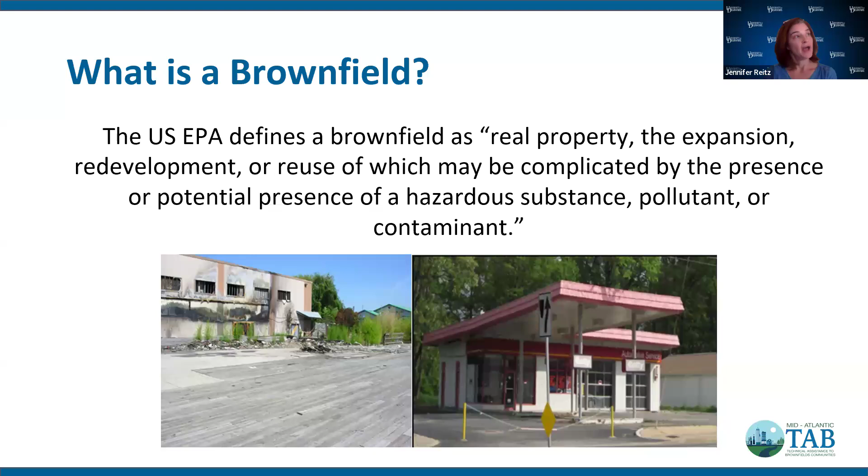But again, just back to basics, and for those who weren't able to join us last week, a brownfield is a property whose reuse essentially is hindered by the fact that there is either perceived contamination or real contamination on that site. And so a lot of these sites were developed as part of our industrial era in the US. And so they're located near waterways or transportation, because that was the most advantageous place to be. And many are located in or very near communities that became disadvantaged or had concentrations of poverty. And of course, that legacy of industrial pollutants poses health risks and contamination both in the environment as well as for the communities living nearby.

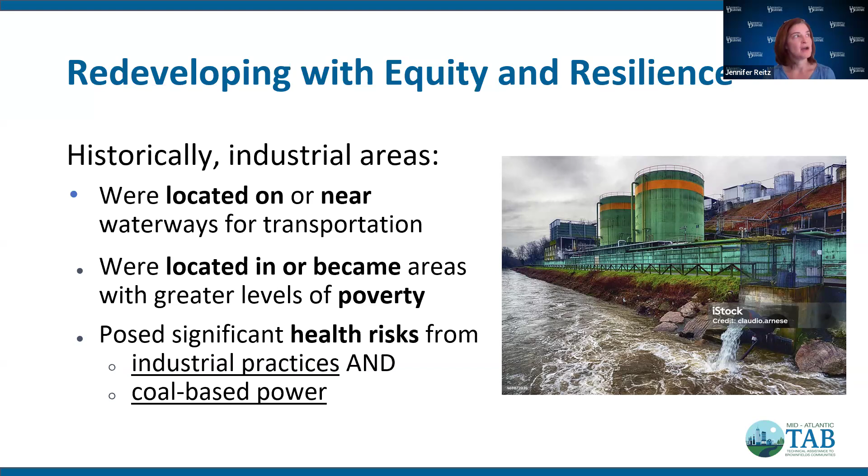And so brownfields redevelopment becomes a unique opportunity to actually reduce those past harms by remediating the contamination, but also building resilience for the future and looking ahead. And we can do this by incorporating greener practices into the redevelopment, as well as cleaner energy, and really building those communities and making them stronger through the redevelopment process.

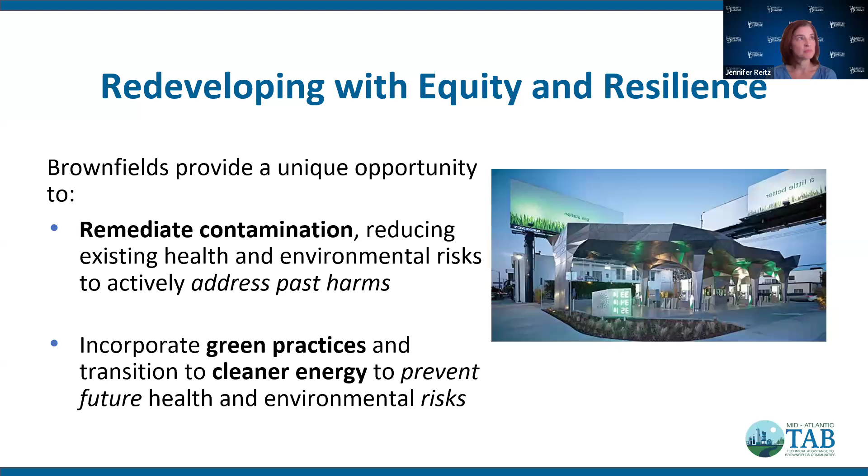I think you're all on the call. We all know what's the right thing to do, and it makes your grant application more competitive.

So I'm going to jump into demolition, and then Lori's going to pick up with cleanup, and finally Mark and Catherine will do the redevelopment piece. So

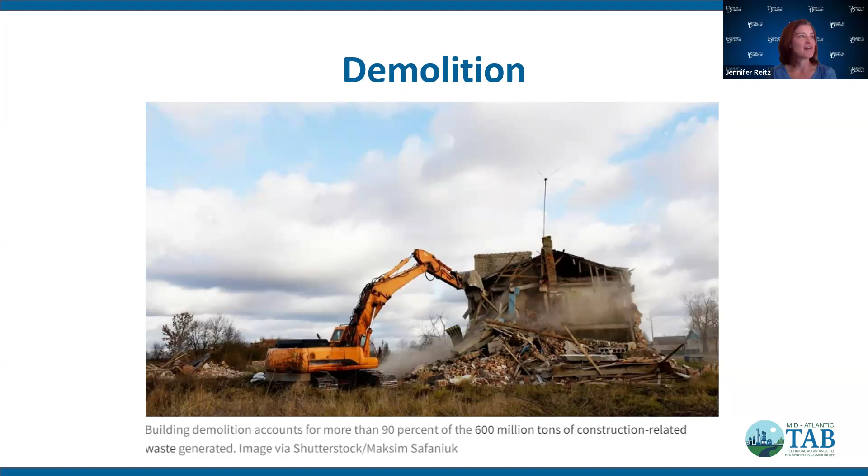Demolition. So building demolition, this was an astounding number to me. Building demolition accounts for more than 90% of the 600 million tons of construction-related waste that ends up in our landfills. And this is every year. This isn't over time. This is every year. Almost 150 million of construction debris was sent to landfills in 2018, which means there is a significant amount that's being recycled, but there's still opportunities for more of that to be reused.

Brownfield remediation, of course, requires the removal of large quantities of building materials, structural materials, and site materials. It is mechanically removed typically and will end up in the landfill, because some of it is contaminated, but maybe not all. But right now, a lot of times the whole site ends up in a landfill, or all of the debris goes there, regardless of the levels of contamination and/or viability. So what's the alternative?

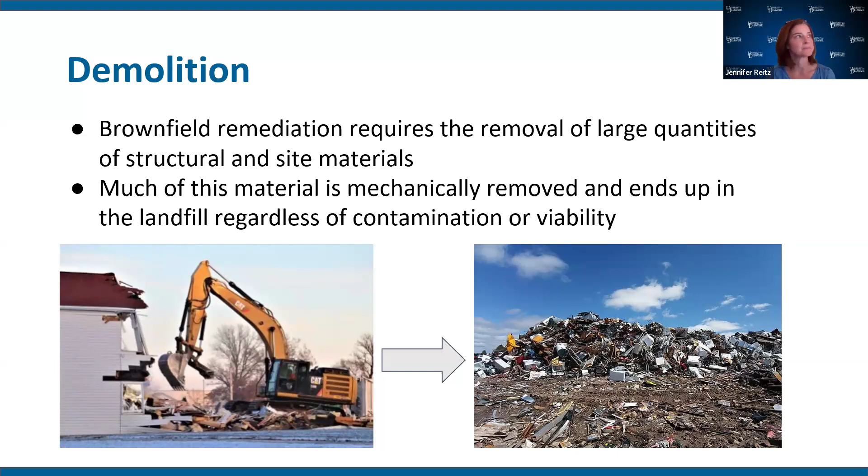Deconstruction basically is the systematic disassembling of parts or whole of a structure in order to recover maximum economic and public good through reuse and recycling. And this is a definition that comes from the city of Pittsburgh. There are several of them, but basically the main parts are really that systematic disassembling of the materials so that you can look at them individually and decide what can be reused and can expand its life cycle instead of landing up in the landfill.

And the other part that I think is really helpful in this is that it doesn't have to be the entire building, right? We can just look at a parcel or look at what's on site and say, okay, maybe it's just the hardwood floors, maybe it's just the windows or the doors or specific structural items that can be reclaimed and reused. And we'll talk a little bit more about that in the next slide.

But in general, the benefits of deconstruction are we're reducing the waste that goes into the landfills, but we're also reducing the need and the demand for virgin materials. And so there's less woods and forests that need to be cut down to create new hardwood materials when we have hardwood that we can reuse. Deconstruction is a labor-intensive process, and so it provides the opportunity to create jobs and become part of what's known as the circular economy, where we're really trying to use materials for as long as possible, but train people to actually participate in that part of the economy.

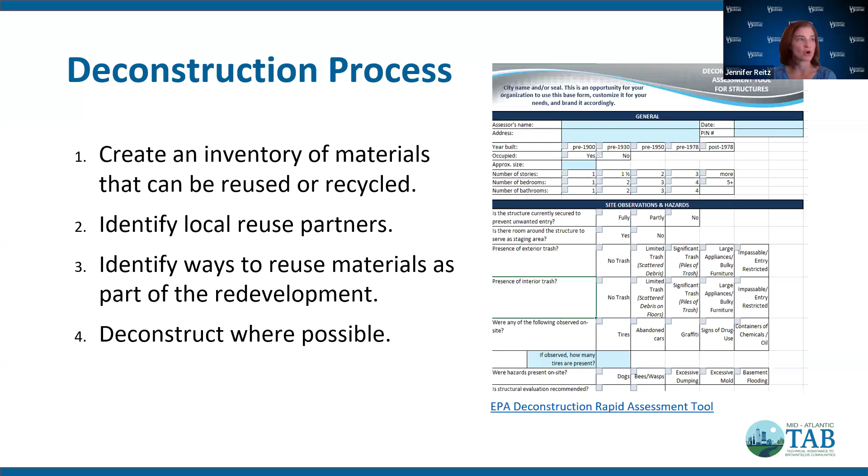But it's a good tickler, to look at and see the variety of materials that actually do have repurposing ability. For me, I would never have thought of roof shingles as something that could be recycled, but it does have a list of that, as well as what the conditions of those materials are, and can just be a starting point when you're looking at this.

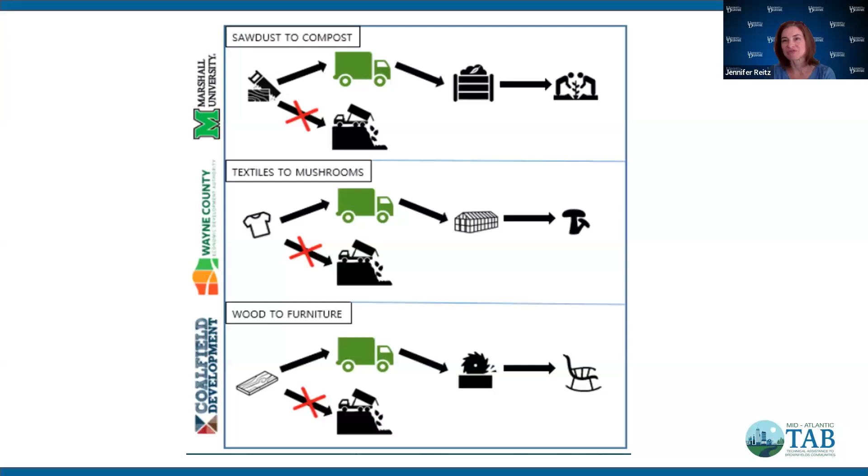Again, when you're talking about materials, some of the things you might not think about, and this was produced by Marshall University for one of the developments that we'll look at a little later. The idea that sawdust is compostable, or textiles and other fabrics can actually be reused to grow mushrooms, which in Pennsylvania is a big industry that we have. And of course, wood to furniture and different types of things there.

But then the direct providers, there's Doors Unhinged, which is actually a national company that just does doors. They specialize in deconstructing commercial doors and commercial rated doors and rehabilitating them and then selling them. And the Community Forklift and Second Chance are, I believe, in the Baltimore area. So they are out there.

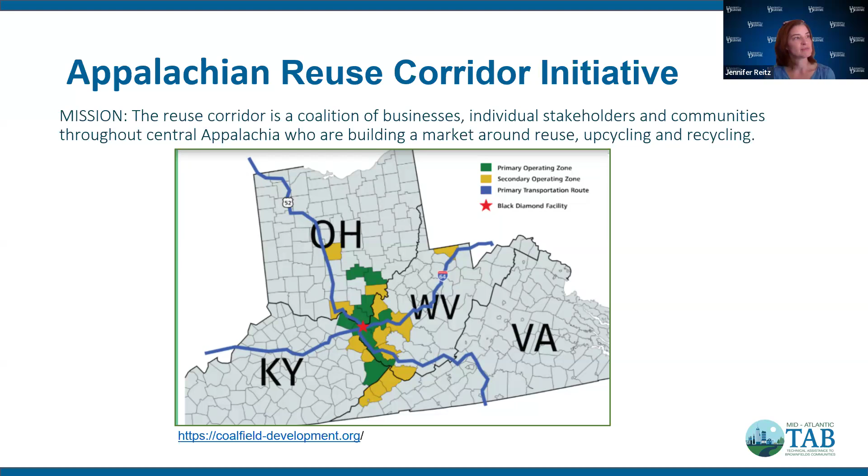And the red star at the center, which is the Black Diamond facility in Westmoreland, West Virginia, is a brownfield that doesn't look much different than what it looks like in the picture right now, but the vision is for it to be remediated and redeveloped as a reuse warehouse. So kind of that central location for these materials to go, as somebody deconstructs, they can perhaps donate or direct it to this warehouse, and then other people can come in and look at what's there and be able to reuse it in other projects.

The other thing I do want to mention is probably where most of the deconstruction work is being done currently. There's a lot of municipal pilot deconstruction projects. And so City of Baltimore actually ran a pilot. The pilot has ended at this point, but there's a really great video on YouTube. I'm not going to share it right now, but the link will be there in the slides when you get a copy of the slides, talking about all aspects of that circular economy and how deconstruction fits into it.

Pittsburgh is currently running a deconstruction pilot program, and it is focused on city-owned land. So they're land-banked vacant properties, and they're partnering with local nonprofits and contractors to do deconstruction and reuse those materials and keep them out of the landfills.

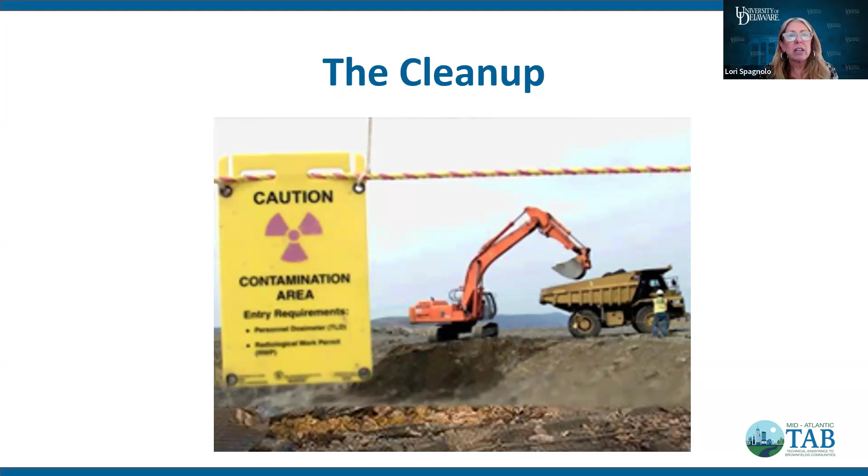And there are a couple overarching principles to keep in mind. First, you want to minimize the environmental impact and reduce the footprint of the remediation techniques that you're using. And you also want to optimize resource use, whether that's water, energy, or other raw materials that you may be using. There is a standard for this, the American Society for Testing and Materials, and it really outlines all the specifics involved, and you will have the link if you want to take a look at that when you get the slides.

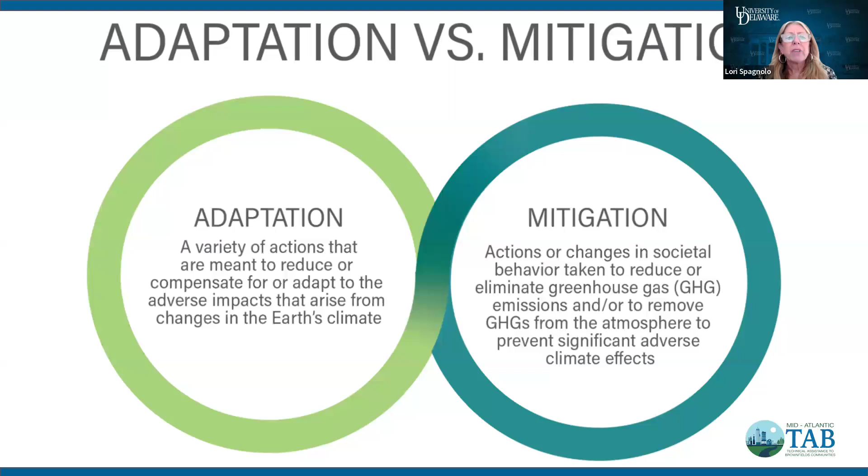So first of all, adaptation versus mitigation. There's kind of two components to resiliency. The first is adaptation, and we can look at that slide. That is really using materials and resources that can withstand climate change. So whether that's organisms or plants that have a higher tolerance to a range of climates, or stabilizing the conditions yourself, whether it's temperature or something else, to really enhance the aspects of the cleanup. The next piece of it is mitigation.

And that's where we really want to focus on reducing greenhouse gases and emissions that are exacerbating climate change, right? So here's where you look at energy efficiency, low emission vehicles and equipment, and use of renewable energy, okay? And so some techniques use kind of one approach, some use both.

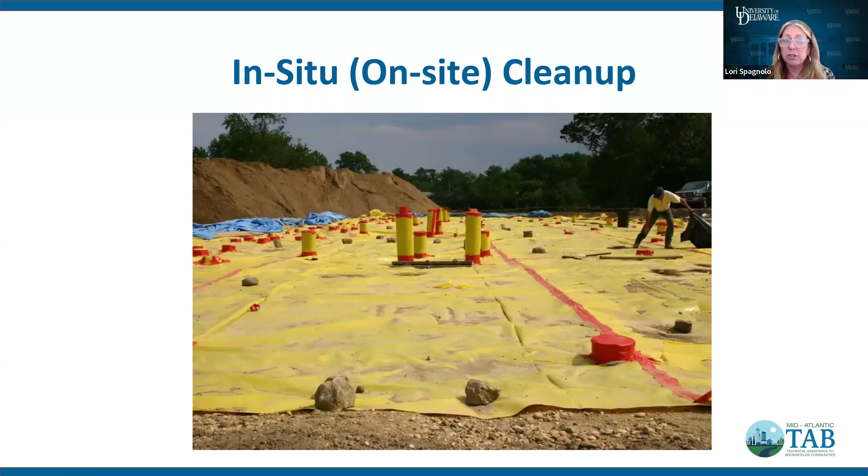First, we'll look at some of the in situ or on-site techniques to clean up a site. And the first is bioremediation, right? And that is really the process of using microorganisms that are going to neutralize these contaminants and remove them from a polluted environment. So in this particular case, we're looking at adaptation, right? We want to use climate resilient microbial strains that may be able to break down contaminants and again withstand a larger range of climate circumstances. And then, like we were just talking about, you can manage that temperature to really optimize that microbial activity.

Another process that is an on-site technique is called phytoremediation. And this is in particular one of my kind of favorite new technologies. It's not very new, but it just seems to have so much promise. And it's just fascinating to me. And this is the use of plants that uptake and accumulate different contaminants, which can then be sequestered or destroyed.

For example, I've heard that things like ferns and mustard greens are really effective at uptaking heavy metals in the soil, right? So in terms of resiliency, you can use a species that, again, can withstand a wider range of climate conditions and also look to capture and store that excess carbon dioxide. So this is an example of an approach that combines adaptation as well as mitigation.

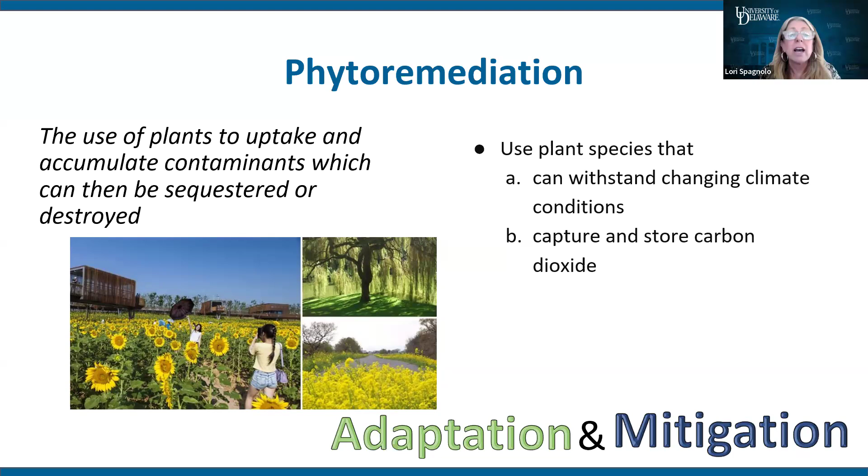The next technique we're going to look at, and this is perhaps more traditional, especially when it comes to petroleum contamination, is soil vapor extraction, or sometimes called air sparging. And this is when you're pulling the VOCs or volatile organic compounds out of the soil using a system of wells and pumps, and then the vapors are treated and purified before they're released back into the atmosphere.

So this is an example of mitigation. We're looking at using energy efficiency here, right, with all the vacuum pumps and optimizing the extraction process to really minimize the use of energy.

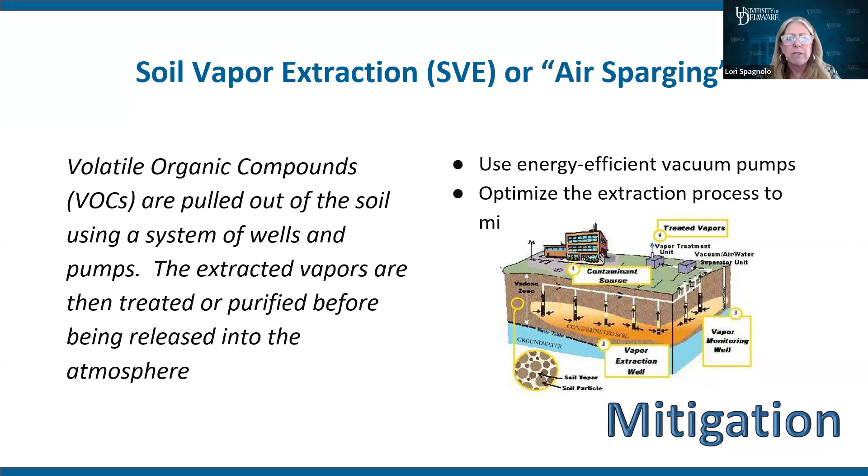And I'm sorry that cut off right there. We can fix that before we send the slides out.

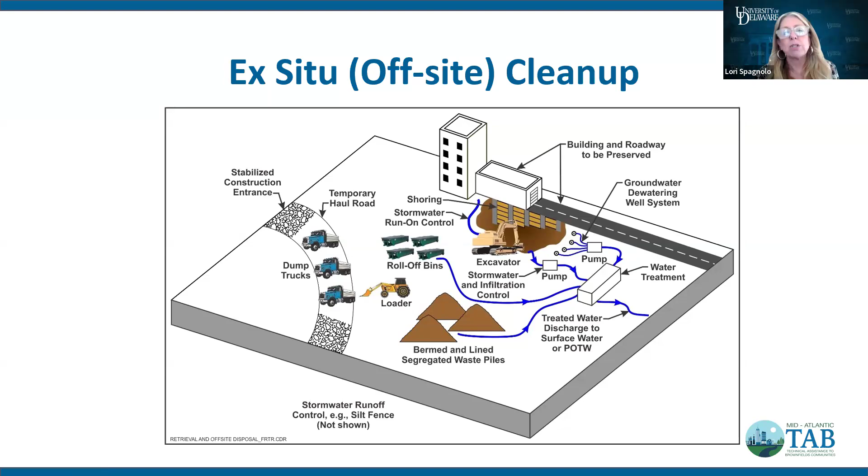So on to, I think we're going ex situ now, offsite cleanup. And the first, again, kind of more traditional technique that you may see used a lot is excavation and treatment, or they call it dig and haul, right? This is essentially where you just dig up the contamination and you physically remove it from the site, and then it's treated somewhere to neutralize it.

It could be incinerated or something else. So here is where you want to kind of mitigate your impacts using dust control measures and low emission transport, and even considering using landfills that can capture and utilize methane emissions.

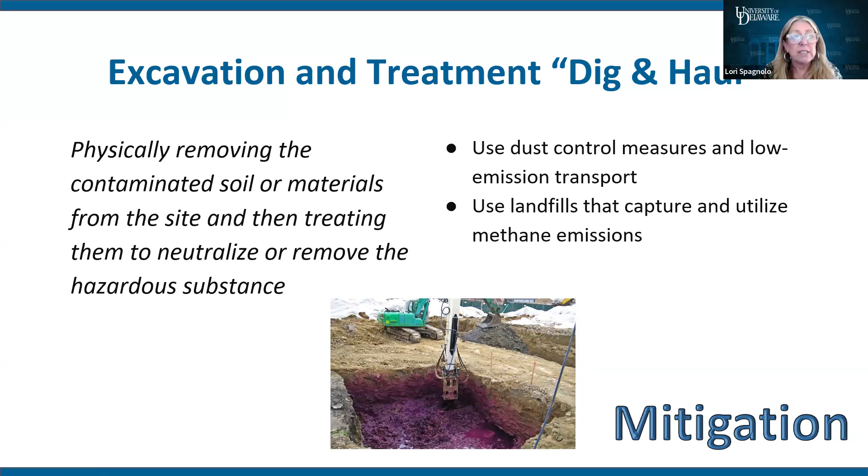Next slide. We do have a couple other types of techniques. Thermal desorption. This is where the soils or sediments are heated until they vaporize, and then they're treated or they're collected to be treated somewhere else off-site. In terms of mitigating aspects of this type of cleanup, you can look at powering your desorption units with renewable energy, whether that's solar or wind, and potentially capture and reuse the heat that is generated during this process.

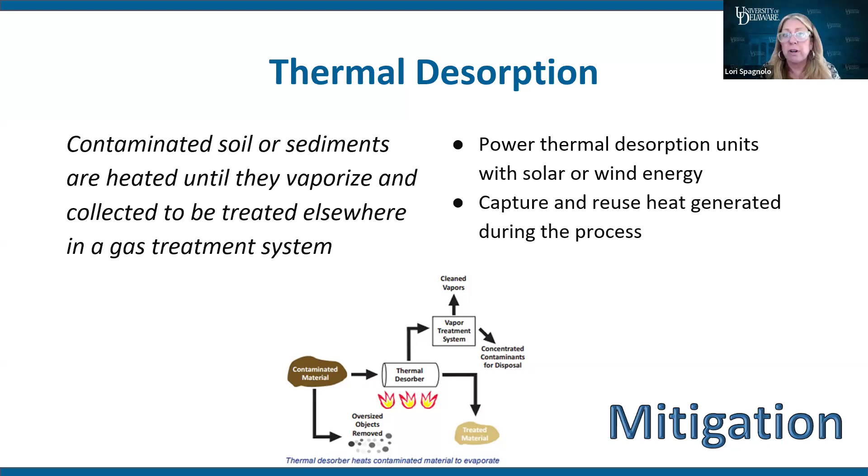Finally, we have chemical treatment, and this is really the use of chemicals to kind of neutralize, convert, remove the contaminants through reactions like oxidation, precipitation. And in terms of adaptation and mitigation, you can select chemicals that are less volatile and more stable under changing climate conditions. And you can use environmentally friendly chemical processes and reagents as well. This can really be in situ or ex situ.

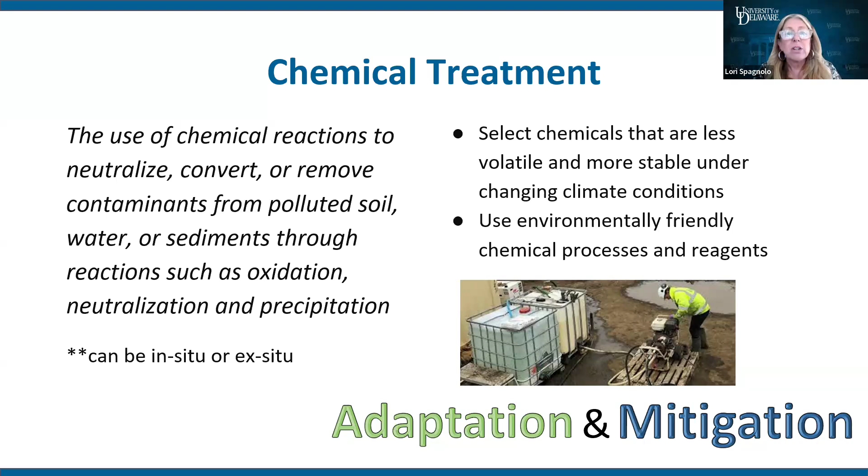So finally, you may be thinking, well, how do we possibly choose between all these remedial techniques? Well, the EPA does have a set of spreadsheets. It's called SEFA, or Spreadsheets for Environmental Footprint Analyses. And it's a set of Excel workbooks, which actually calculates the carbon footprint associated with a cleanup, looking at 21 different metrics that evaluate aspects of materials and waste that are being used and generated, the use of water, energy, air, and land and ecosystems.

It is a very complex system, but it's absolutely helpful and a great way to really be thinking about the impact of the type of cleanup you select. And a lot of you on the call may not be doing this yourself. You may be just subbing this out to a consulting company, but you need to know to ask for it, right? We need to be able to ask the questions of, what type of impacts to the environment and the climate is the type of cleanup going to have that you're recommending.

So I think it's important that we just put this out there and have that understanding that there are different ways to approach this, and there are different ways to look at the impact that a cleanup can have on the environment and the climate resilience in the future. And so with that, I believe that we are moving to redevelopment at this point.

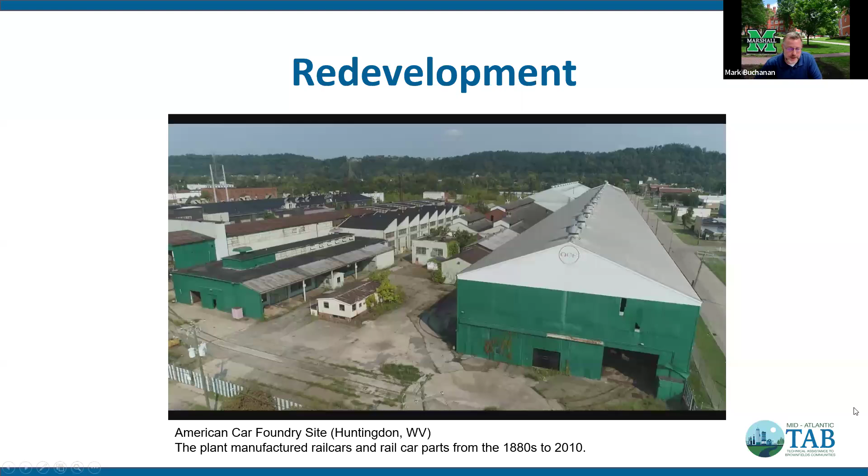And really the anchor is another brownfield site over here in this left-hand corner. Marshall University just put a brand new baseball stadium in over here. It's pulling a lot of folks in during the spring to see baseball games. In addition to that, there's a minor league team that plays there through the summer. So really good things coming through. Next slide, please.

When sites get redeveloped, it is an opportunity to redevelop the project in a manner that positively contributes to creating a more climate change resilient community. In our part of the country, we're looking at severe rainstorms increasing in severity and frequency, higher temperatures, those kinds of things.

In this next set of slides, we've divided some stuff up. First, green infrastructure: we want to talk about how we manage all that extra water in a greener fashion to try to combat climate change. We're also going to chat about green building techniques. When we say green building techniques, we're talking about an umbrella, and under that umbrella is a variety of different methods. We're just going to chat about a few of them.

And of course, we can't have this conversation without bringing up renewable energy, and energy efficiency is a fair topic as well. Next slide, please.

Before we get going too far, I like to give context about how and why. I'm a former stormwater manager, and this stuff is always near and dear to my heart. So I apologize for those not familiar with it, but this really does play a role. These problems we're going to be having with excess water, urban flash flooding, can all be attributed back to the urbanizing landscape. That means an increase in impervious surfaces like roads, roofs, parking lots. All of those things shed water.

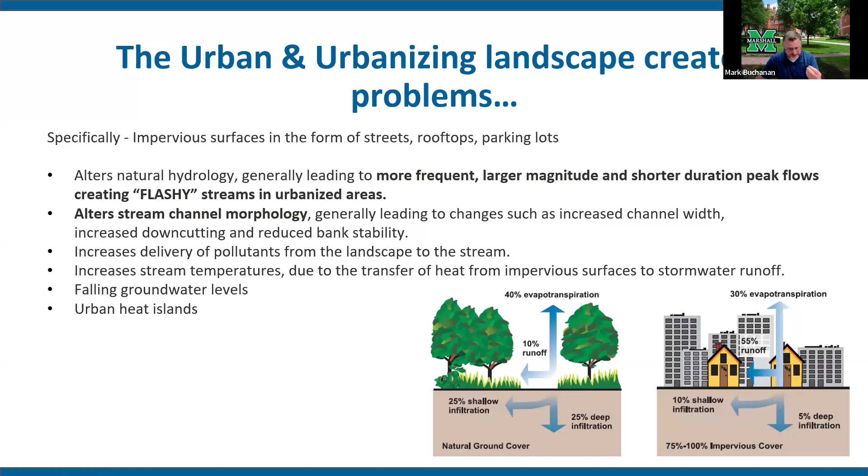Other issues that we would attribute to an urbanizing landscape is urban heat islands. Next slide, please. An urban heat island occurs when cities replace natural land cover with dense concentrations of pavement, buildings, and other surfaces that absorb and retain heat. Then you end up with increased costs for energy, for air conditioning, higher levels of air pollution, and some heat-related illnesses.

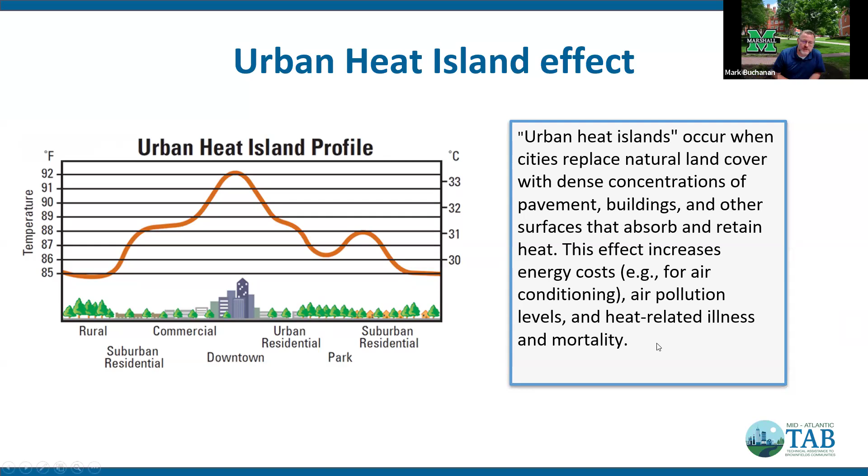The graphic on the left-hand side is a very simple concept. In the more rural communities, you're looking at temperatures running 7 to 8 degrees cooler in those more rural or suburban type settings as opposed to the more urbanized sections of town. Next slide, please.

So when we're talking about runoff and stormwater and dealing with that, we're always going to have a conversation. And for years, when we talk about infrastructure, you're going to hear some folks talk about gray infrastructure. Gray infrastructure is traditional stormwater infrastructure, basically gutters, drains, pipes, and in some cases, even some retention ponds.

When we speak about green infrastructure, it's sort of a broad topic. We're talking about a management approach where we're trying to mimic the hydrologic cycle. Instead of running the water off in a pipe and then sending it off to discharge in a local receiving body of water, we're trying to get that water down into the ground. Something more close to what it should be, trying to copy nature.

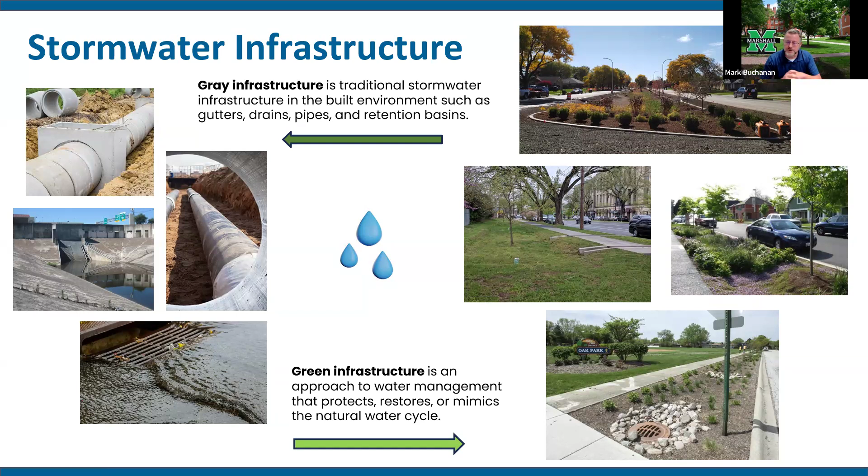Now, on a brownfield site that you're redeveloping, that could be a problem. And I have a couple slides later on showing that we ran into some issues when we were trying to do this on site here on campus. Next slide, please.

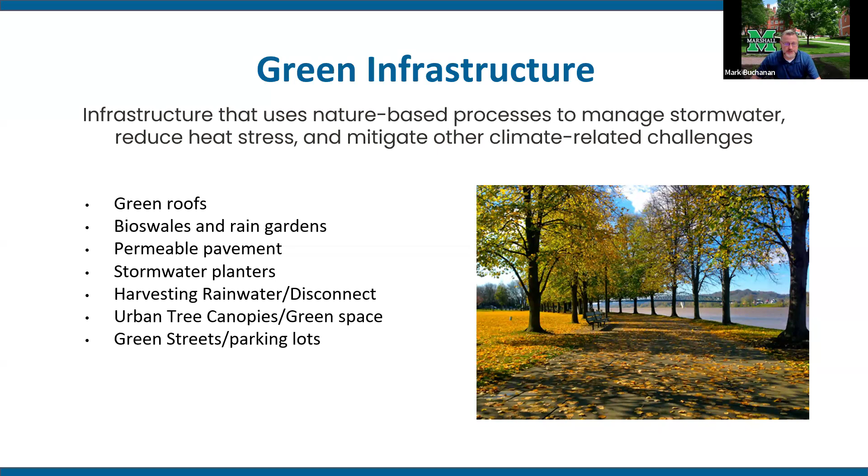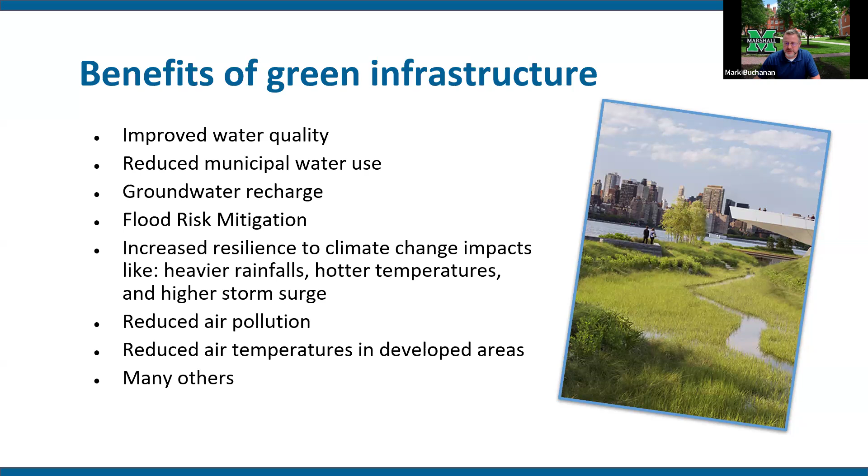And I'm the guy, when we're on vacation, we stop and take pictures of stuff like this, and my wife just rolls her eyes. She can never see the attraction that I have for this kind of stuff.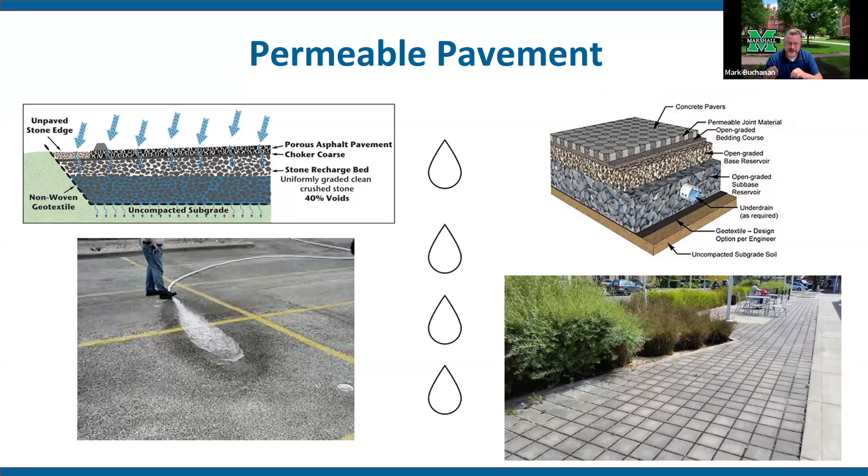Both of these are going to require, I don't want to say extensive, but there's definitely maintenance that will have to be considered if these become options in a project. Because if you basically just put them in and leave them like they're going to be the answer to your prayer, you're looking to have problems, because eventually the fine silts and stuff will fill up those pore spaces. And then there's definitely a level of maintenance that has to be considered with these. Next slide, please.

Stormwater planters. Occasionally, when you have a project and you're wanting to capture and divert stormwater, you might not have the real estate to be able to make a footprint for a rain garden or even a bioswale, or move it to another place. So this can capture it. It's almost like having a small miniature rain garden in a box.

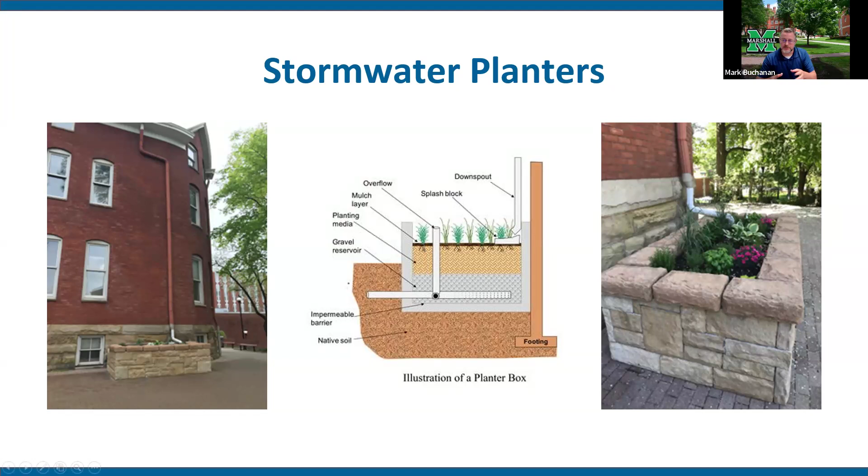Or put it right back down into the ground and mimic the natural hydrology of an area. Sometimes the best answer is trying to harvest that rainwater. And when you talk about a rainwater harvesting system, you can go from something as basic as a 55-gallon drum up against a building with a downspout going to it and an overflow, to some of this other stuff that's more elaborate, like in this picture on the left here, where you have an underground tank type cistern to capture water. And the picture down below that with the large green tanks, that's a fairly significant system as well. That's probably close to almost 10,000 gallons of water, I'm guessing, being stored there.

And none of this, at least in my experience, I've never been associated with a project where we harvest rainwater as a potable source of water. The uses you're looking at for this type of diversion would be landscape irrigation, even flushing toilets if you get it plumbed properly and put pressure on it, washing equipment, washing vehicles, and in some cases even watering livestock. That's an option as well.

One other thing I thought I'd at least bring up, this odd looking structure around the tank, that's sort of like a first flush that captures a lot of that excess stuff off of the roof that you might not want in your tank. So it really helps eliminate the maintenance on that as well. So again, you will have maintenance. Even with a diverter like that, the tank's still going to have to be cleaned occasionally. All right, next slide, please.

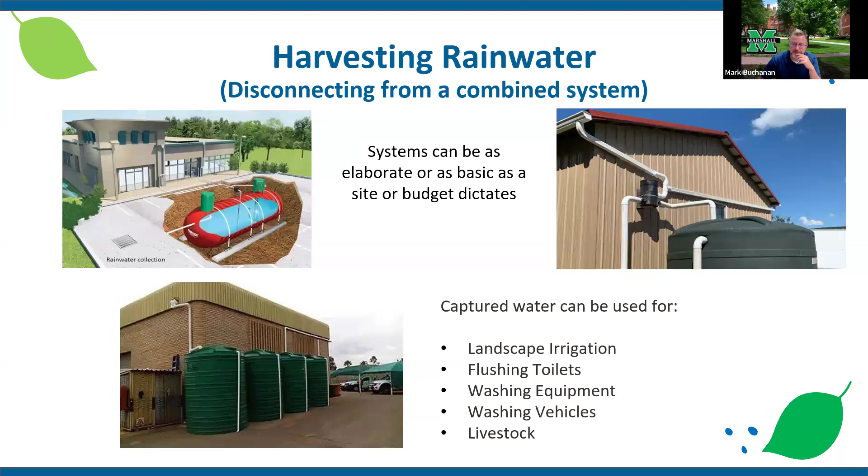All right, and like I mentioned earlier, we were looking at a project back in 2016 or 17. I'm getting old, and the years are starting to run together, so I apologize. I know it was somewhere around 16 or 17, but the university had decided that they were going to build a baseball stadium right here where this white star is at.

This is a brownfield site, which really wasn't that big of a deal. I guess they were going to consolidate material and place the stadium over that consolidated material, where they were going to get rid of the highest hazardous containing material off-site. They were going to send it to a landfill, but the rest of the low-haz stuff was going to be basically consolidated under the baseball stadium where that white star is sitting at.

I came into the picture on this when they decided we were going to put a parking lot in on the opposite side of this street right here. And as we worked with the engineers, it turns out they had some phase 2 work done. They delineated a plume of a chlorinated volatile organic compound. And all of a sudden, my idea of putting the first inch of rainfall that we received on this parking lot was no longer an option for us.

They weren't going to allow us to put that down and try to get it to perk down into the soil for fear of moving that plume of the chlorinated volatile compound that they had there. And I'm not sure how far down it was. It was just above an impenetrable surface is what the engineer said. So it must have been maybe bedrock or something it was sitting on.

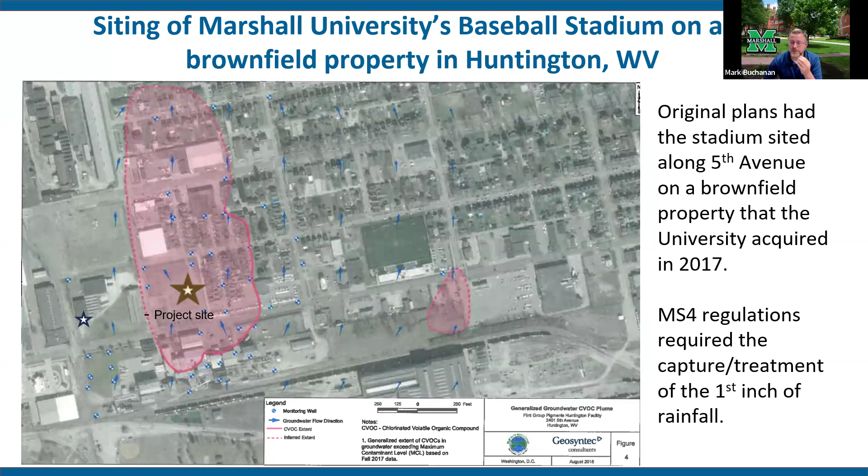But if we were going to put any stormwater down, we were going to actually make it mobile, and they did not want to do that. So we had to come up with another plan. Go ahead, next slide, please.

And we ended up with a bioretention cell that they had planned on installing. And if you look at it closely, and I do apologize, this is actually the design that came across my desk when we were trying to handle the stormwater management side of things. But you can see that there's an impermeable layer of clay that was going to be put in to keep the water from perking down into the native soil.

And the plan was that we would capture all of the rainwater, and it was going to go into the city's storm drains and then into the sewer system, with the thought being that at least we were going to give it some lag. We were going to slow that swath of water from going into the city system. We were going to slow it down. We had to get approval from the DEP.

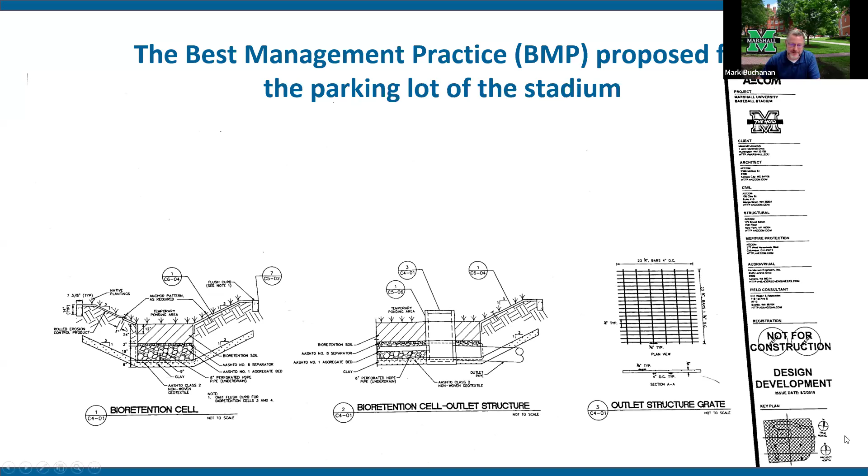Everything became approved, and then they decided that they were going to move the baseball stadium about a half-mile away after we went through all this work, and they located it at the other site that I mentioned earlier in the presentation, back over toward the river. So all is fine and well. We're getting ready to do a cleanup project on this site now, I believe in August. We got a cleanup grant to take care of it. Next slide, please.

And going into the green building technique section now, another umbrella. When we talk about green building techniques, we could be talking about a variety of things, but all of them are the practice of creating healthier, more resource efficient models of construction, renovation, operation, maintenance, and demolition that aims to reduce air and water pollution, stormwater runoff, waste, and unhealthy indoor environments, and transform buildings into a sustainable part of the landscape.

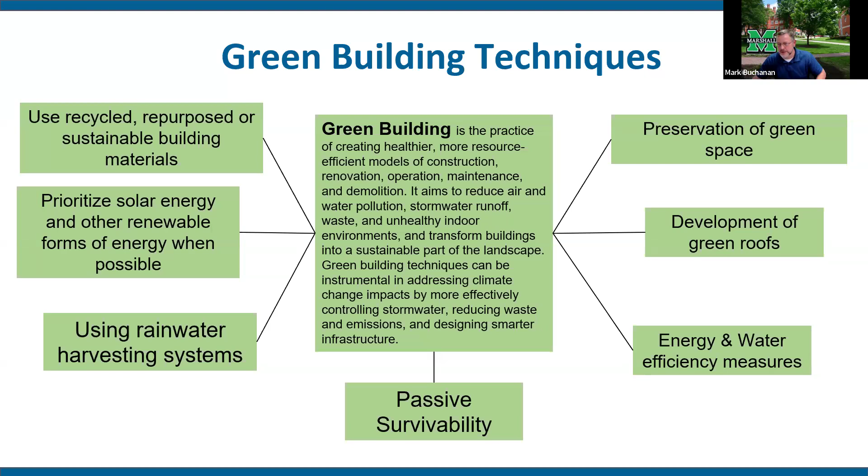And under that umbrella of green building, we've got a variety of topics, from simply preservation of green space, developing green roofs, energy and water efficiency measures, a concept called passive survivability, that's my favorite, rainwater harvesting systems, and then prioritizing solar energy and other renewable forms whenever possible. And then using recycled, repurposed, or sustainable building materials, just like Jennifer mentioned earlier. Next slide, please. We're going to go over these green building techniques real quick.

And this is a little bit extreme when we're talking about green. So I don't think Mr. Olmsted, when he designed Central Park, had anything in mind that it was going to look like this 100 years later. But nonetheless, thank God that he did. If you've ever been, it's a beautiful place to be, but it's definitely an oasis in a concrete jungle.

But the benefits of green space are immense for reducing erosion, sedimentation to the receiving streams, improving habitat in those streams. So ultimately, you're improving water quality, and it also provides that chance for the rainwater to perk into the ground and recharge that aquifer. And it's also going to help to moderate a lot of those higher temperatures, like we were talking about on those urban heat islands. Next slide, please.

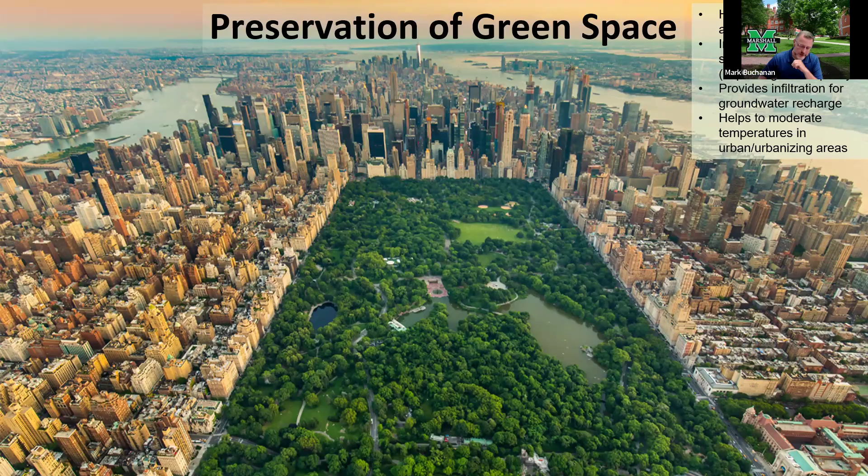Green roofs. I was always surprised at how much the green roof actually does reduce runoff. And in this case, they're telling us 65%. This is an EPA stat. Makes the roof surfaces 30 to 40% cooler and reduces the heat flux from the roof to the building by up to 72%. Long-lived as far as the practice goes, 40 years or more. And then there's some wildlife benefits as well.

So next slide, please.

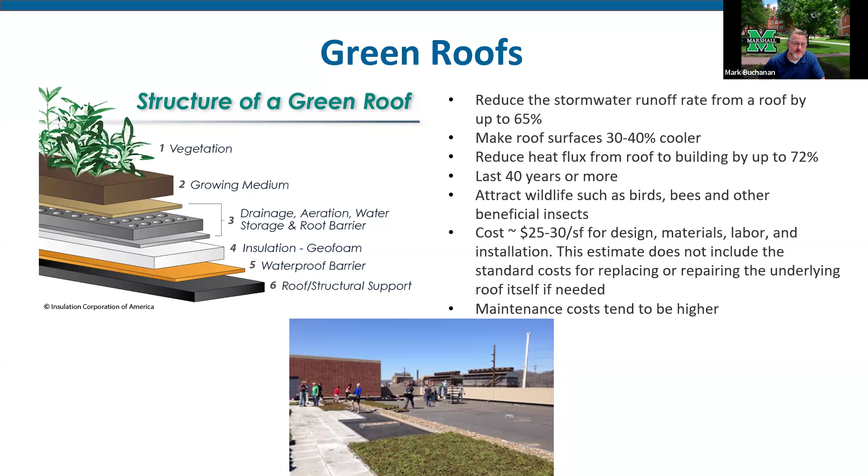While on the topic of this umbrella of green building techniques, you have to mention energy and water efficiency measures. High performance windows, green insulation, efficient heating and cooling systems will make a huge difference as far as energy use. We're reducing the amount of energy that's used in a building. Lighting efficiency: if possible, natural lighting is the way to go. LED lighting works as well. It basically sips energy as opposed to the old-time incandescent light bulbs.

Water efficiency as well is important. Low flow bathroom fixtures, high efficiency appliances, and there's my favorite again, rainwater collection. In Charleston, the capital of West Virginia here, they recently did a remodel of the Civic Center, and aside from all of the improvements architecturally that were made on this building and how beautiful it is now overlooking the Elk River, the more important stuff, at least from our vantage point, is it uses collectively 45% less water than it did prior to the remodel, and a reduction of 25% in energy costs.

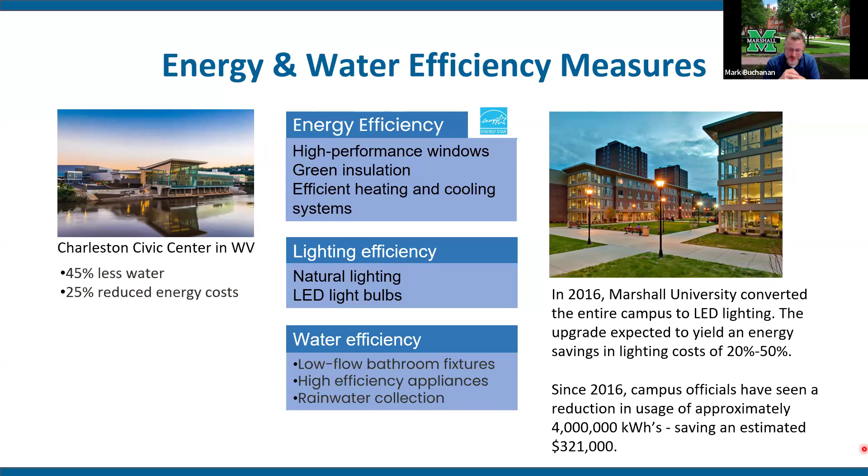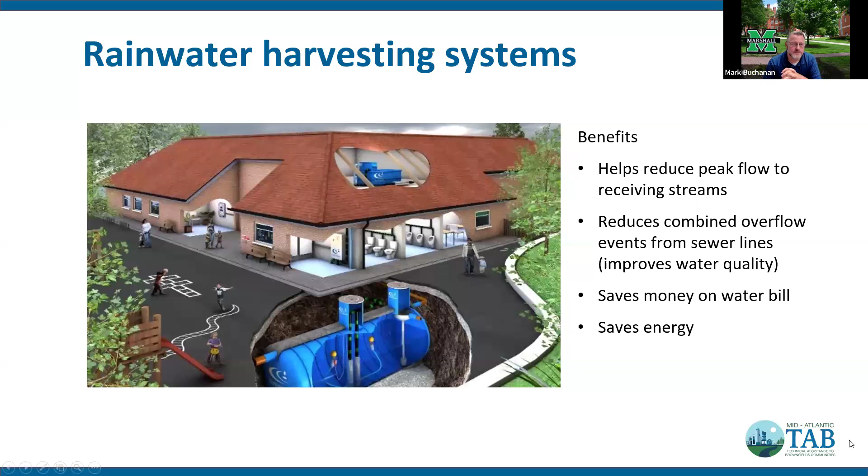And if you have the option when you redevelop a parcel, integrating alternative energy or renewables is a very, very wise decision. And we're fortunate enough in our neck of the woods here. Coalfield has a company called Solar Holler, and it seems like when they first came to this area, you would see a truck or two. I see them everywhere now, and it's a wonderful thing to see.

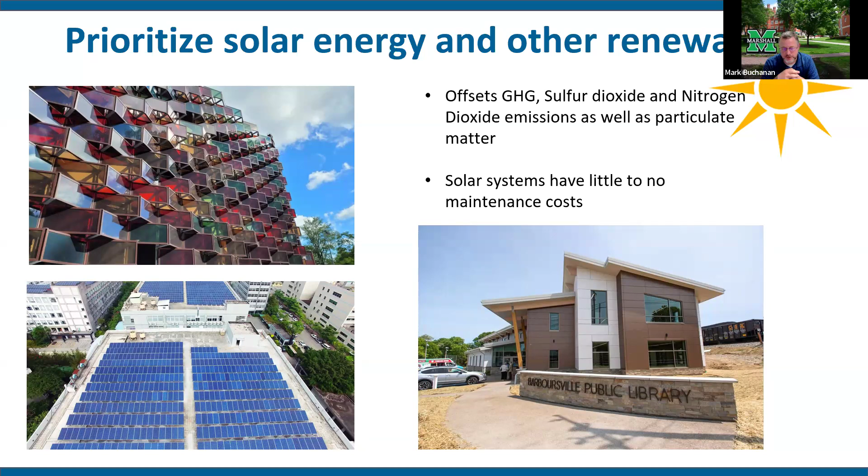But a lot of the benefits when we start talking about solar and alternatives: you're going to offset greenhouse gases, sulfur dioxide, nitrogen dioxide emissions, and the particulates as well. And in our area, the maintenance on a solar system is relatively low. In some of the drier climates, dust and things can settle on the panels and cause some issues, but we get enough rain that we don't usually have to deal with that. Okay, next slide.

Now, Jennifer mentioned some of the upcycling and repurposing and sustainable building materials and recycling. I wanted to include it in my section as well. There are a lot of things that are recyclable. Most of the time, it's just having the community have a will or wanting to make that commitment to see that it's done and they follow through to make sure that those things are recycled.

But anywhere from different types of plastics and concrete, steel, asphalt, all of those things can be recycled. And just like Jennifer mentioned earlier too, it requires less energy than using the virgin materials. You're also going to reduce the volume of landfill waste that we send to be buried. You're going to reduce emissions, and ultimately we're conserving natural resources.

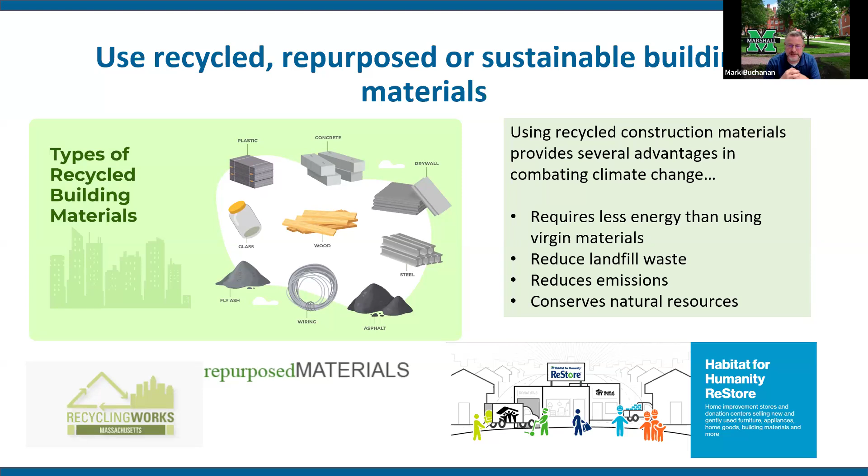Passive survivability is a building's ability to maintain habitability without relying on external utility systems for power, fuel, water, or sewer services, as well as being able to withstand floods, severe weather, and temperature extremes. Ultimately, it's a collection of all those things that we've been talking about coming together to take care of those different building systems in a unit. Between harvesting rainwater, solar panels, you could liken it to trying to live off the grid.

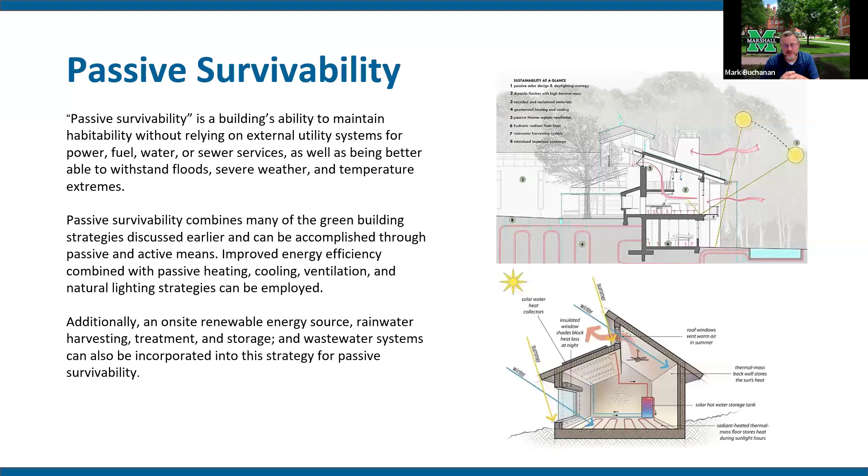But several things come into consideration when something like this is used. The orientation of the building, does it face where the sun rises or the sun sets? So building orientation, thermal insulation, trying to take advantage of natural daylight and ventilation, positioning trees and other things like that in the landscape for providing shade for solar control. Then potentially using green roofs, green parking areas, all of those things are fair game when we start talking about passive survivability. Next slide, please.

And I know around here, I've seen these projects used for parking overflow from a parking lot. It would be nice to see them utilized more as the first choice instead of just as an overflow. But those grass cells actually protect the roots of the grasses from getting crushed from the weight of the vehicles. And plus, it's a great way to infiltrate a ton of water when you're dealing with the MS4 issues. Next slide, please.

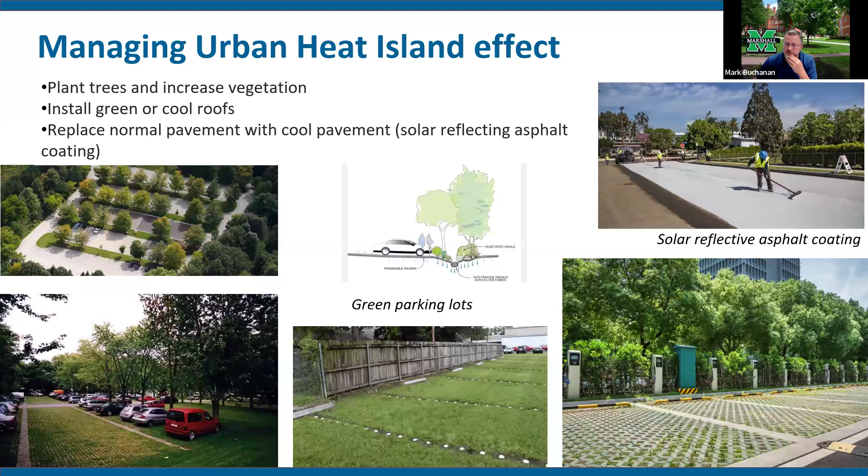You don't really think about trees as absorbing a lot, but when you think about the total surface area of a tree and that it has to be completely saturated before it starts shedding water, it's a good place to store water when you're looking at things from the perspective of managing stormwater. So definitely extremely useful.

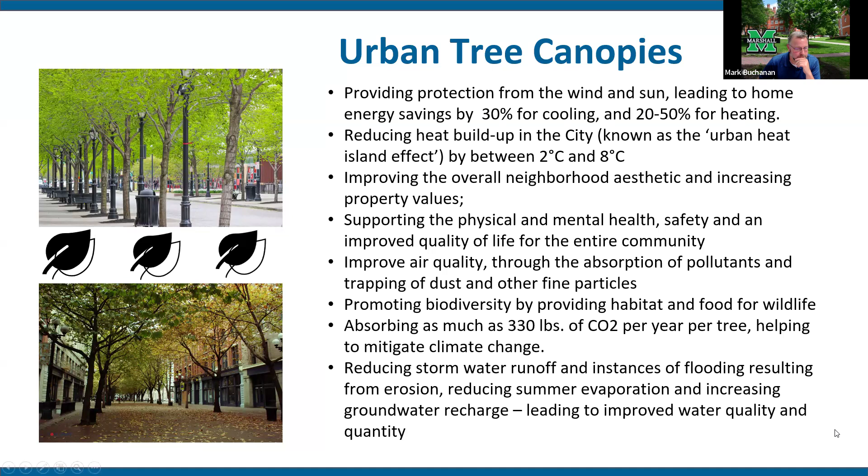Well, that's my last slide. I'll be happy to take any questions if anybody has anything.

Thank you so much, Mark. I know we had a question a little bit earlier that I think Catherine was going to elaborate on. Just what are some ways to address gentrification concerns communities may have after a neighborhood brownfield is redeveloped?

Yeah, thank you, Becca. And I'm curious to hear if any of the other presenters have thoughts on this as well. I don't know that I have one answer, right? I think that this is a really complicated issue, and anyone who says, I have the answer to gentrification is probably fooling themselves. But I think, Becca, in the chat, you responded by talking about particularly community needs and community engagement. And I think that that is, at least from my perspective, at the crux of the issue, right?

And I want to go back to the Black Diamond example that Jen brought up on her slides. So that is a property here in Huntington. Marshall's partner, Coalfield Development, is working on that project. And that's a giant old factory that is right in the middle of a residential neighborhood. And so I know that that project, they have a monthly community advisory group that comes together, and they talk about progress on the project and also what the community wants to see out of it.